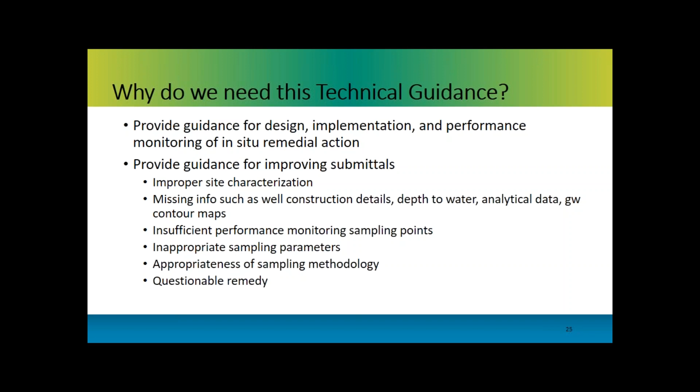The department also saw insufficient performance monitoring sampling points and inappropriate sampling parameters being utilized. Incomplete submittals lead to extensive dialogue between the department, LSRPs, and subsurface evaluators, thus delaying the review process. The department wanted to provide guidance for improving submittals in order to accelerate the review and approval process.

How is this remedy to remediate groundwater contamination identified on the site? The remedy is questionable. It seems as though the remedy is proposed to just clean up the 2 impacted wells and nothing else. There's no extent of groundwater plume identified or delineated, and no down gradient monitoring or groundwater flow direction, no sentinel wells either depicted. Later in the training, during Joe Ludi's presentation, you will see a complete monitoring well network that depicts an appropriate design for evaluating the performance of the remedy and to document the protection of receptors.

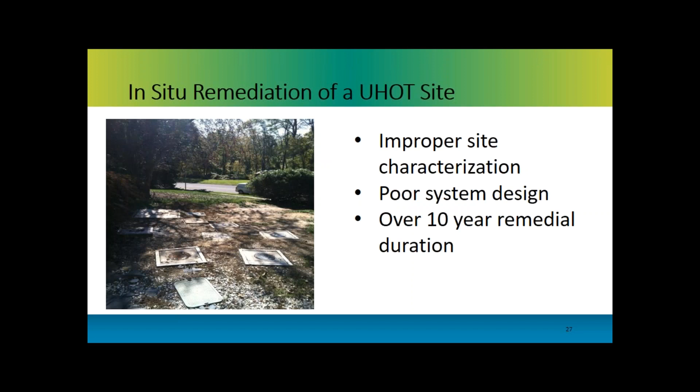Next, I have a few slides from an actual homeowner UHOT site that was remediated via in situ. This homeowner was told that in situ would be less invasive to his property, and this is how his property looked for over 10 years. Poor site characterization and poor system design contributed to the site looking like this for numerous years.

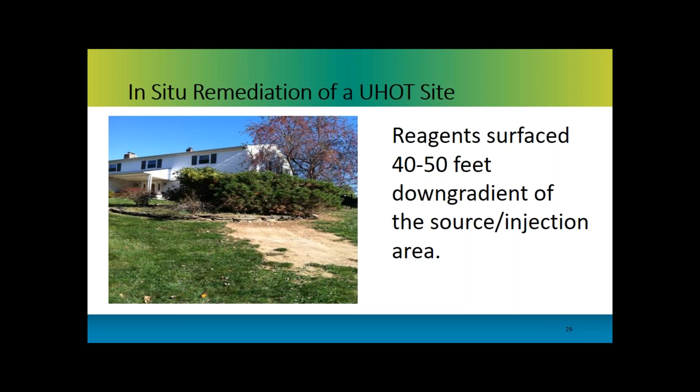An understanding of the subsurface environment is critical when designing an effective remedial action and monitoring program. Not only was the source area where the tank was located greatly impacted by the remediation, but poor site characterization and system design led to daylighting of reagents as far as 40 to 50 feet away from the injection area. As can be seen, the daylighting caused a significant amount of damage to this property.

The remaining slides will go through a brief overview of our entire document, including the appendices and tables. This technical guidance document is meant to enhance the guidance on site characterization concerns, selection considerations, and performance monitoring detailed in the groundwater technical guidance. It provides awareness to other regulatory hurdles, including air permitting, pinelands, highlands, homeland security, etc., and should be used in conjunction with other regulatory and technical guidance.

The regulations discussed in our document are outlined in Section 3. The main regulations discussed are the technical requirements for site remediation, the NJPDES rules, and ARRCS.

Site characterization and in situ remedial design will be discussed in greater detail by Joe Ludi in the next presentation. This section covers the importance of adequate site characterization and development of a good conceptual site model. Both are critical in identifying source areas, defining plume extent, potential receptors, and predicting fate and transport.

Distribution of reagents and contact time with the contamination is key to a successful remediation. This document stresses a holistic approach to be used to remediate sites, not to remediate individual wells. What this document does not tell you to do is which technology to choose. The investigator should use the information in this guidance document to determine which is the most appropriate technology to remediate the site based on numerous lines of evidence.

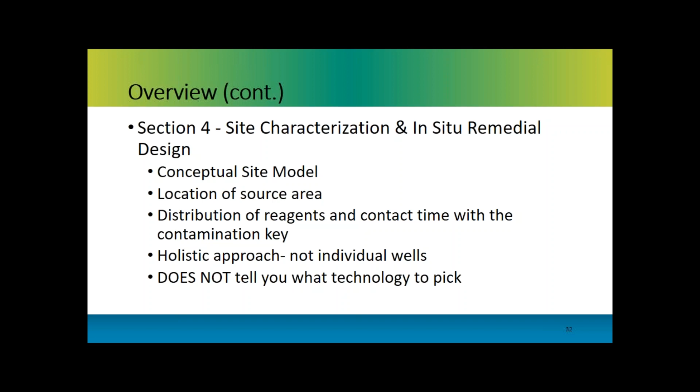Section 5, General Performance Monitoring Objectives, will also be discussed in greater detail by Joe Ludi in the next presentation. Section 5 covers remedial goals and performance objectives, performance metrics, and designing an effective performance monitoring plan.

Section 6 goes into detail about the 3 broad classes of technologies: biological, physical and chemical, and thermal. The investigator should apply the general guidance outlined in Section 4 and 5 and the technology-specific guidance in Section 6 when preparing both the monitoring plan in the remedial action work plan and the monitoring plan in the DGW proposal. This section should also be used as applicable when developing the monitoring and evaluation plans for the remedial action permit application for active groundwater remediation.

Later in the training, we will present 2 case studies that go into great detail on 2 of the technologies listed above. We have a chemical reduction technology case study utilizing zero-valent iron and a biological case study using anaerobic bioremediation to address chlorinated solvents.

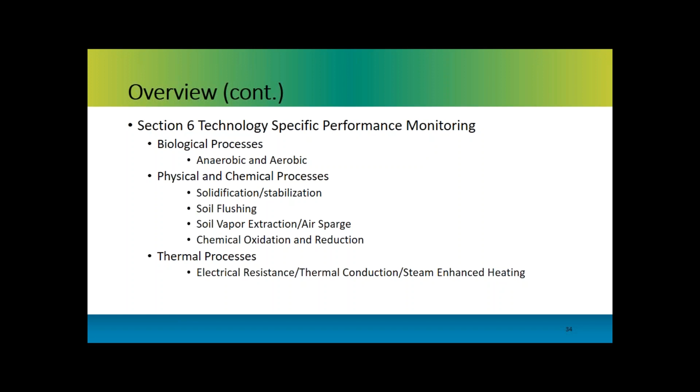Okay, this is your quiz. So everybody online, I hope you are paying attention to this. Which of the following is not a process that this technical guidance document covers?

So we are launching. Are we ready? Okay, so we now have 60 seconds to discuss this. Your choices are biological, thermal, physical, and spiritual. Okay, so seems to be a consensus in this room what that answer is going to be. So let's see by a show of hands. Do we think the answer is A? No. B? C? D? There we go. All right, so just as a reminder that when we are done with the speaker and we have a chance to ask questions, please remember to wait for the microphone and introduce yourself at that time. So how much more time do we have? Oh, goodness gracious. This is fun to be up here and talk about this for another 30 seconds.

Uh-oh, 11% haven't done this. You need to get on here, everybody. Yes, we do have 89% who have submitted this. And you need to answer 3 out of the 4 questions. So I hope the other 11% got 1 more, 2 more. We're doing well, everybody. Okay, 5 seconds. So we have 60 seconds. All right, we're done. Handing it back over to Maria. And the answer, answer is? Here, I'll push it. It's not moving forward. It's not moving. There we go. And the answer is? Spiritual. You are all correct. Yes.

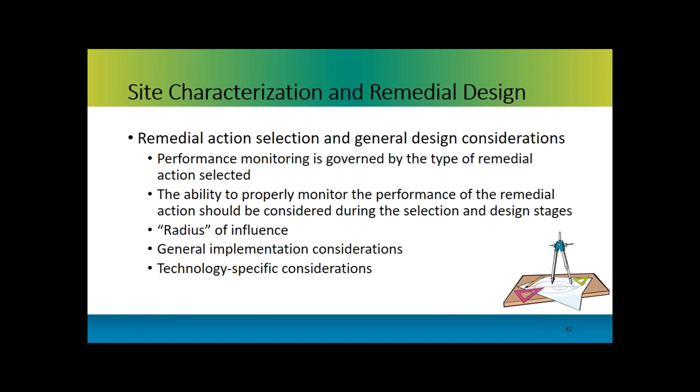Some other general considerations: are we treating all or just a portion of the site? Maybe it's just a pilot test, targeting a small area so we understand if the technology is working before scaling up to the full area. There are also some technology-specific considerations elaborated upon in Section 6.

A critical step towards successful remediation is integrating treatment design and dosing with the performance monitoring. The document includes discussions on injection wells versus monitoring wells.

We're all tempted to see, well, there's that monitoring well over standard, so let me inject something into it and treat it. Well, it doesn't really turn out to be a very good monitoring well after that point. So there's guidance on not injecting into monitoring wells, and also on considering how close to put injection wells to existing monitoring wells so they still remain useful for monitoring the parameters they're meant to monitor.

Which brings up another good point: what are we trying to monitor? Are we doing process monitoring or remedial effectiveness performance monitoring? Process monitoring happens during the actual remediation, while remedial effectiveness performance monitoring occurs before and after, which we'll talk about in a couple of slides.

There's also a discussion in the document on site contaminants versus competing reactants. Does the performance monitoring plan include all the constituents of interest at the site, not just the contaminants, but the reagents you're injecting and other potential byproducts?

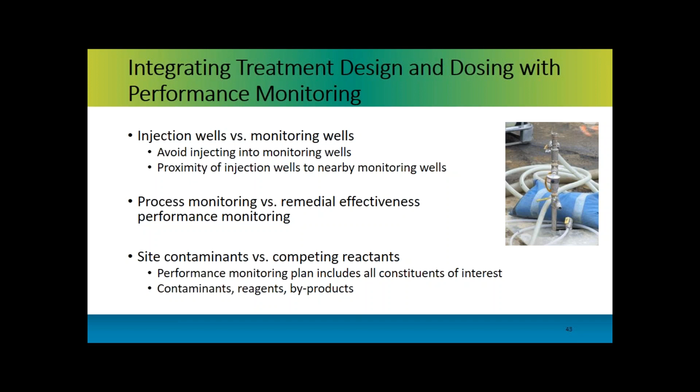So there's a section in the document on pilot testing. What is a pilot test? Why do I do a pilot test? And what are some of the benefits of pilot testing?

It's a good way to assess the feasibility and effectiveness of the technology. It's also a good opportunity to provide necessary design and scale-up data for full-scale remediation, things like radius of influence, injection rates and volumes, and it even helps with remedial cost estimating, a lot of which feeds into the performance monitoring plan details.

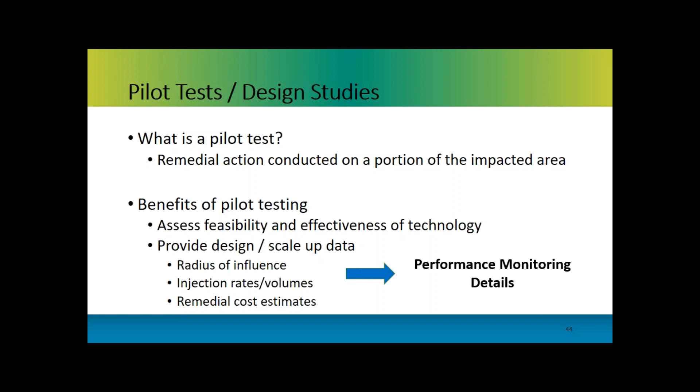As I mentioned a few moments ago, the document discusses the differences between process monitoring and remedial effectiveness performance monitoring. Process monitoring is typically done during treatment to optimize the process.

Am I seeing increases in dissolved oxygen or changes in ORP? Am I seeing temperature increases, changes in groundwater elevation? These are the things that tell me whether what I'm doing right now is actually what I intended to do. Is it reaching where I want it to reach? Is it not going too far?

And then there's the remedial effectiveness performance monitoring, which is probably a whole different set of monitoring wells. Those are the before and after: I started with this concentration, now I'm down to this concentration. Maybe you look at those after one treatment, after multiple treatments, and towards the end of your remedial life cycle.

And there are various performance metrics you look at to determine if the remedial performance objectives have actually been met.

On a related note, monitoring for permit by rule for discharge to groundwater may not be the same as monitoring for a remedial action work plan. The remedial action work plan may include multiple areas of concern, multiple contaminants of concern, and certainly a lot more things than there may be in the PBR.

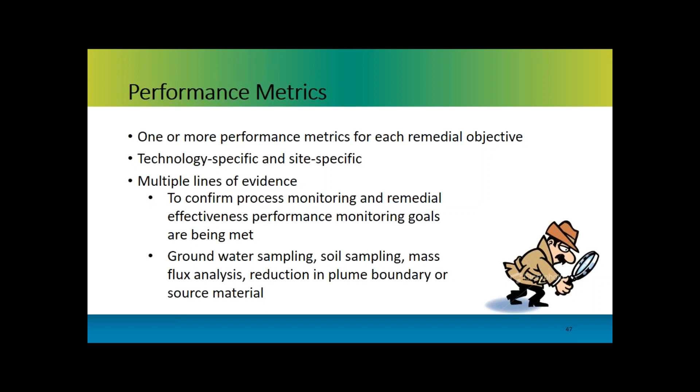There are often several performance metrics for each remedial objective, right? They should be technology specific, site specific, and should include multiple lines of evidence to confirm that the process monitoring and remedial effectiveness performance monitoring goals are being met. And what are some of those? They may be groundwater sampling results, soil sampling results, mass flux analysis, reduction in plume boundary, source material, and other things.

It's important, as I mentioned earlier, that the performance monitoring consider all the various media. So you may have a site that just has groundwater and soil impacts, and maybe some nearby surface water bodies or nearby buildings, and currently there's no impacts at the surface water or in the indoor air at the adjacent buildings. But your monitoring plan should consider whether or not those impacts are a potential once you start your remediation.

Certainly the dynamics of the subsurface change as you start injecting things or extracting things or both. So there are some key factors in your performance monitoring plan that need to be considered as to whether or not those other media may be impacted.

Things like location of the treatment area, contaminant mass flux with or without injections, number and location of injection and monitoring wells, timing and frequency of sampling. Okay, if I inject today, where might it get tomorrow? Where might it get a month from now?

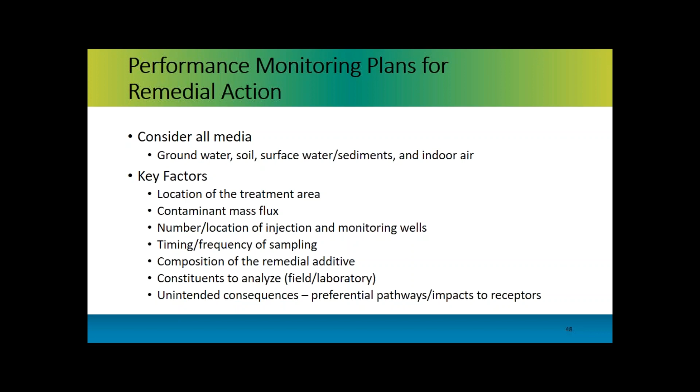Composition of the remedial additive - I have to look for what I'm injecting to make sure it's not lingering on longer than it should be. Constituents and other constituents to analyze for both in the field and in the laboratory. Again, all this leading towards monitoring against unintended consequences, right? Understanding if there's preferential pathways that may lead to impacts to receptors that you didn't anticipate.

As Maria mentioned, she showed a slide of a PBR site plan that was maybe a little lacking in detail. Here's something a little bit more useful to both the investigator who's designing and implementing the plan, as well as the folks at the department that are reviewing permit by rule requests.

So you've got our source monitoring, source area, treatment area defined in gray here. We've got source monitoring wells. We've got our injection wells shown, our injection well radius of influence, right? So that was kind of what we saw in Maria's example.

But we also have background monitoring wells, plume monitoring wells. We show the extent of the dissolved phase plume. We've got some plume fringe wells, sentinel wells, groundwater flow direction. It provides a much more complete picture of what's going on at this particular site.

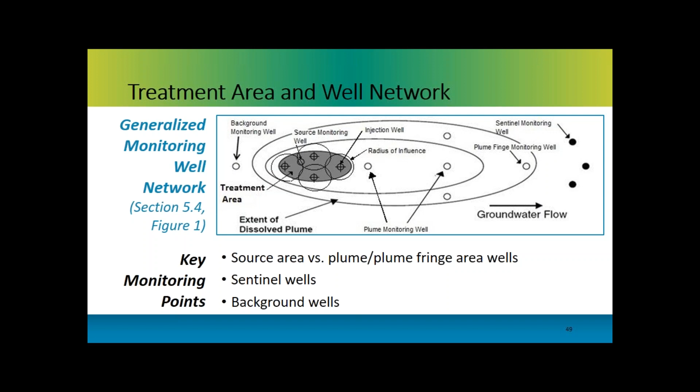And again, that's not just so that you can get your PBR approved by the department, but also helps you understand what you've got, how you're addressing it, and will be helpful during the actual remedial phase to monitor.

Now, I promised a sneak peek into section 6 of the document, and here it is, right? Maria mentioned that we have lots of useful tables and appendices. So one of those tables, if you have in your handouts there, is table 1.

It's the performance monitoring parameter table. It includes a list of field parameters as well as laboratory parameters for groundwater and soil, and the types of analyses using a numbering system to indicate by technology whether the monitoring parameter is: 1, required analysis for DGW permits; 2, a recommended analysis for the particular technology being implemented; 3, a conditional analysis for the technology - maybe you need it sometimes and maybe you don't need it other times; and 4, where the parameter simply isn't applicable to the technology at hand.

So here's a closer look at the table, right? Cover your right eye. And, oh, never mind. So for all of us, and obviously you have it in your handout, right?

So the heading of the table includes a listing of the sampling media and the parameters. And this happens to be an excerpt from Table 1, which Carnum will review during his case study.

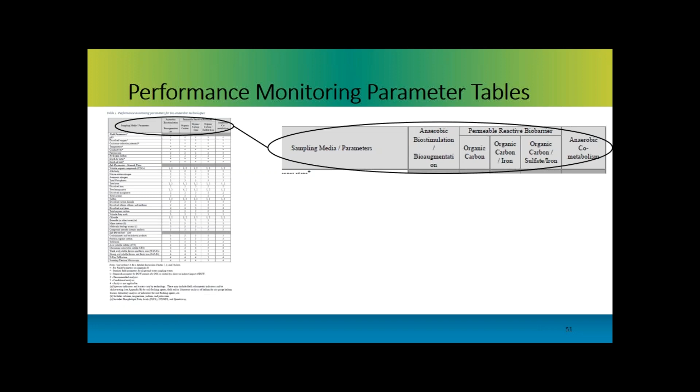Anaerobic biostimulation and bioaugmentation, a couple of different permeable reactive barriers, and anaerobic co-metabolism. Again, you've got a list of field parameters, lab parameters, and here's an example where for volatile organic compounds, they get a 1 and a 2 rating under anaerobic biostimulation and bioaugmentation.

So 1 being DGW required and 2 being recommended for the analysis of this particular remediation. Further down the list, you'll see TOC. TOC gets a 2, so it's not necessarily required to be monitored for your DGW permit approval, but it's probably something that you want to be monitoring for in most cases in an anaerobic biostimulation or bioaugmentation approach.

And then volatile fatty acids, and I think Carnum will discuss these as well. This is something that, well, maybe under certain circumstances, for certain sites and certain reagents, it may be of interest to monitor and maybe not for others. So the point of including that in the table is to say, hey investigator, this may be of interest to you, it may not be, but something that should be considered whether or not it falls into your plan.

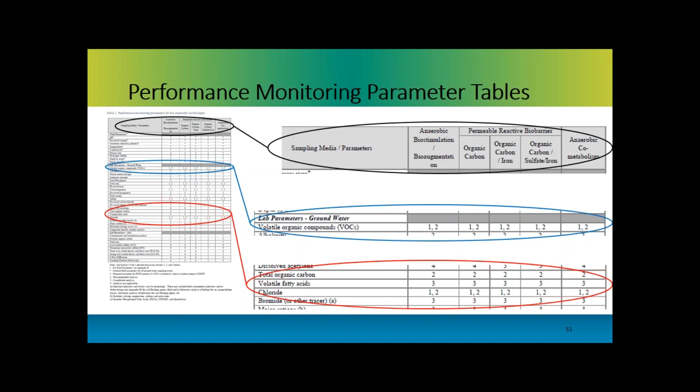And again, this is not an exhaustive list in the document. By no means should it be construed to mean that the department is endorsing or not endorsing something by its inclusion or not inclusion. Just a list of things that the folks on the committee felt were fairly commonly utilized and had a fair amount of experience seeing come across in the various proposals.

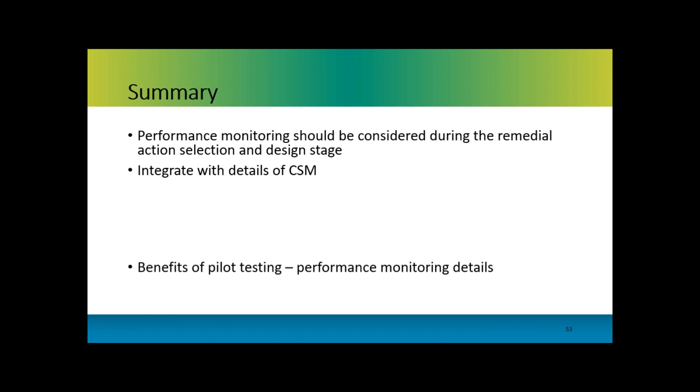So in summary, performance monitoring should be considered during the remedial action selection and design stages, not an afterthought. The performance monitoring plan should integrate with the details of the conceptual site model. Consider the benefits of pilot testing - if nothing else, it certainly provides a lot of performance monitoring plan details. The discussion on the distinction between process monitoring and remedial effectiveness performance monitoring.

Again, the discussion on interim goals and final goals, and you probably have both of those. And again, encourages folks to use multiple lines of evidence when developing your remedial performance monitoring plans. And at the end of the day, use the guidance, the resources in this guidance document to develop effective performance monitoring plans for your sites.

Okay, now is your opportunity, both online and here, to ask any questions. Do we have any questions of what we have covered so far? We're going to be really early. You've been quite thorough, that's very good. Which is awesome in our presentations, I guess. Very good, anything online? Let's give them a few minutes, we'll give them a minute to type up. Nothing? Okay then, all right. We sure there's nothing out here? Okay. Thanks, Lynn. Okay. And then, thank you.

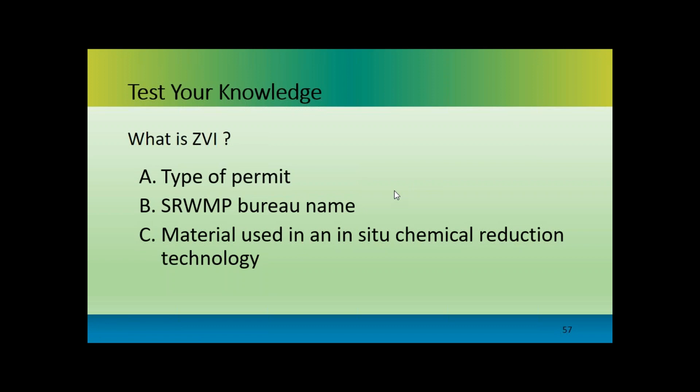Here we go, once again they are going on and their time starts, so it's launching now. That's why I had so much less time last time, because now the clock starts. So now everybody has 60 seconds to fill in the answer. So what do we think here? Is ZVI a type of permit? Yeah, no. Is it a bureau name within the Site Remediation and Waste Management Program? Some chuckles in the audience. And how about, is it a material used in an in-situ chemical reduction technology?

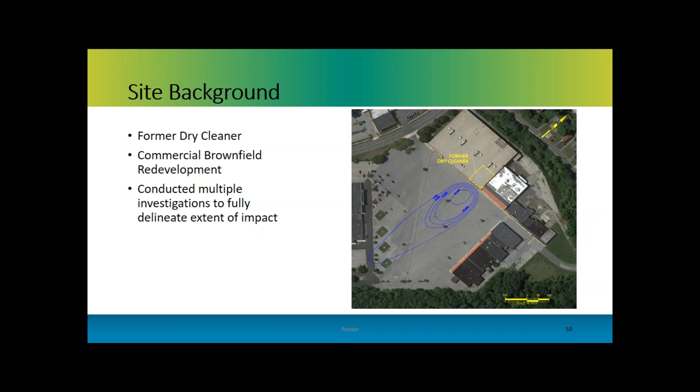So we had a lot of investigation, we had a lot of data to deal with. We were starting out this project in a pretty good place. And then it was completed.

For this particular project, we had a very limited treatment time frame. The site was being redeveloped for a retail center, to be open for the Christmas shopping season, so the site had to be up and built, and all of our remediation had to be done by Thanksgiving. We could not be doing anything at the site between Thanksgiving and Christmas. Not only that, because this was an active construction site, there was a lot of activity going on all the time - cranes, crews going back and forth - so we had a very limited area of the site that we could operate in. Once the site was built, we had to have no above grade operations. The area was to be a parking lot used for parking, that's it, we couldn't have anything above ground.

From a remediation point of view, our goal was to achieve significant mass reductions in the core area of the plume, and then allow for monitored natural attenuation to treat the remaining lower concentrations. We'd done a very significant amount of three-dimensional fate and transport modeling to confirm that the MNA would work and that we would not impact any downgradient receptors.

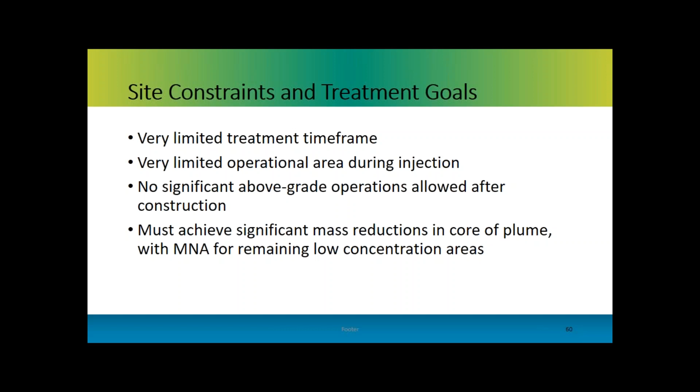Then above that, we had a zone that was called the shallow saprolite zone. It had a much coarser texture, more like sand from a textural point of view, but it still was saprolite material. Higher porosity, higher permeability, somewhat lesser concentrations up in this zone.

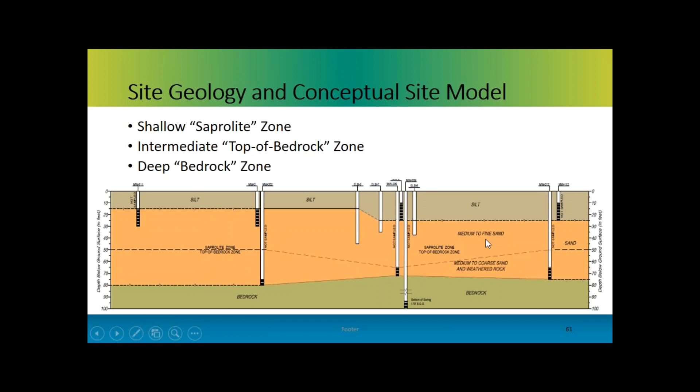So when we were evaluating our remedial action for this particular site, we had a number of things to consider. We evaluated multiple technologies, including pump and treat, AS/SVE, and so on. These were eliminated pretty much up front because we couldn't have anything remaining at the site once it was built out. We looked at our microbial population and found it was insufficient to promote significant biodegradation. But given all the site constraints—the limited area to work in, the limited time frame, the fact that we couldn't have anything above ground at the end of the day—we decided to go with ZVI for treatment of the source zone.

We did conduct a treatability study using on-site soils and groundwater to confirm the effectiveness of the technology. However, given the time constraints, we simply did not have time to do a formal pilot study. We did do an informal pilot study at the beginning of the injection process, where we did an injection, looked at our radius of influence, looked at concentrations at certain locations, and looked at our iron concentration in groundwater and so forth. So we were able to determine that, yeah, it was working, but this was not anything near a formal pilot study type program—this is kind of a back of the envelope approach in the field.

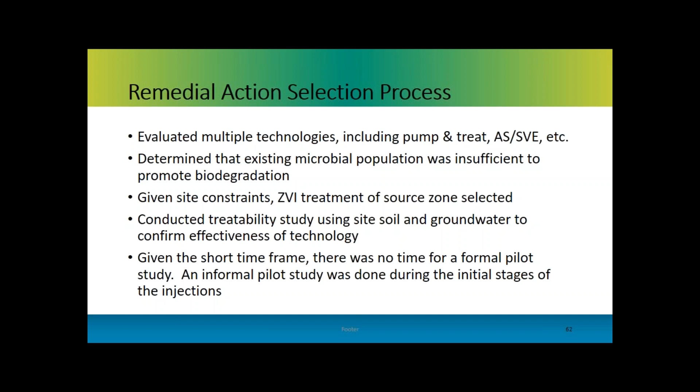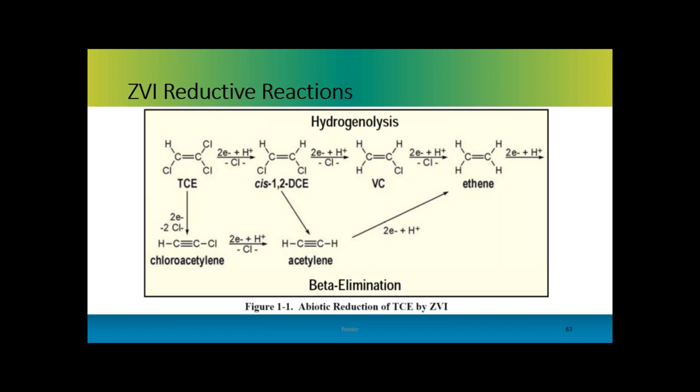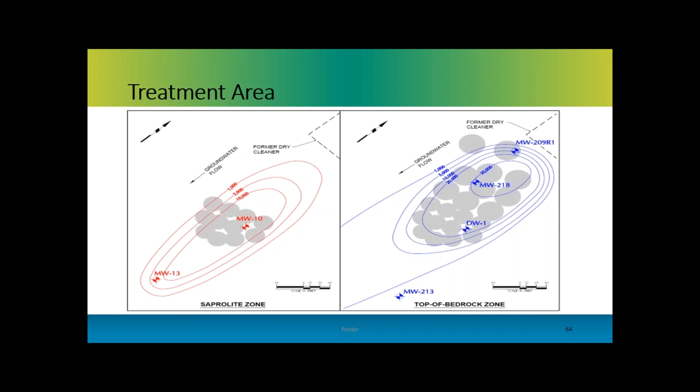So here's what we're talking about. We used microscale zero-valent iron, or Ferrox is the trade name, at a dosage on average roughly about 0.5%, and it was injected using pneumatic fracturing technology.

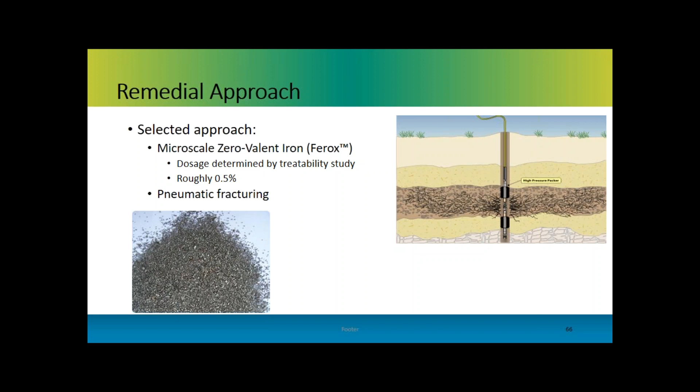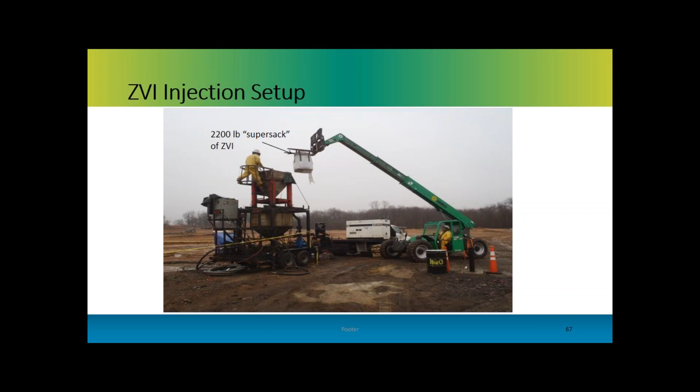The ZVI gets dumped into a hopper, then goes down to a mixing unit where we make up the ZVI slurry. We took very detailed measurements of the amount of ZVI per volume of water, so we know exactly the mass of ZVI going into each batch. Down here you had the various equipment associated with the actual injection of the ZVI.

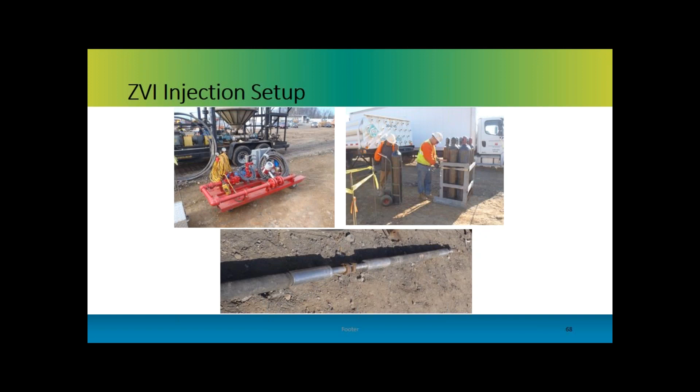During the injection, as part of our performance and process monitoring metrics, we monitored a number of different parameters, probably the most important being our radius of influence. One way we evaluated this was by laying out a network of very sensitive tilt meters in three dimensions radiating outward from a given injection point. Those were surveyed, and as the injection took place, we measured the amount of ground heave on the surface. That enabled us to determine that we were achieving both our minimum 30-foot radius of influence, but in some areas we were getting out to about 100 feet.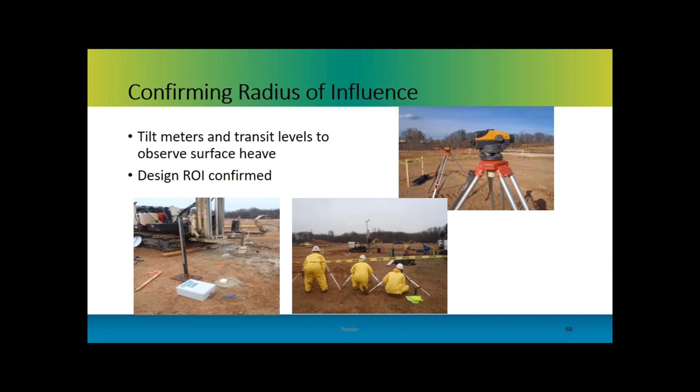That was a bit of a concern. Again, you want to have a substantial radius of influence, but on the other hand you want to hit your target as well. So we had to reduce our injection pressures to a certain extent to make sure our radius of influence was not too large.

It comes to the surface and can occur from a variety of different pathways. In this particular case, we had a borehole location that wasn't properly grouted, so we had to go in and auger that location out and completely regrout it. A variety of other things can happen too—just normal microfractures in the formation can result in this. There's a couple of points here: when you look at this, it looks terrible.

We calculated, for that particular injection, an estimate of the volume of ZVI that made it to the surface. When you compare the volume or mass of ZVI that made it to the surface versus the mass we're actually getting into the ground, it's a fraction of 1%. So it's a very minor amount, but it looks terrible.

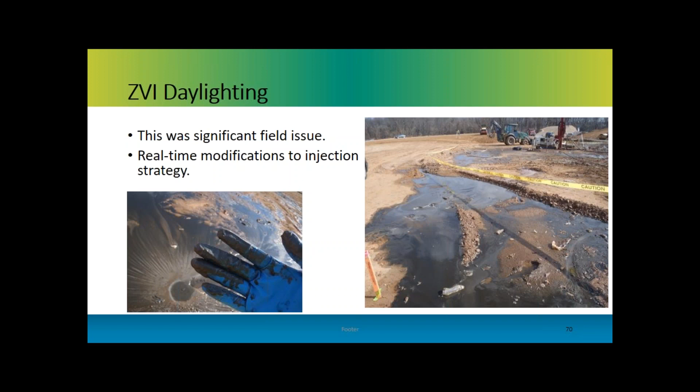That approach worked for the rest of the site. We got a little bit of daylighting here and there, but we were able to control it.

So this gives you an idea of some of the things we were working with. This has to do with the remediation technology being very effective, given that we had a very, very complicated and congested work area, an ongoing construction site.

You can see here's our geoprobe rig right here, and a crane transporting a major section of rafter right adjacent to it. This is basically our treatment zone superimposed on the final site redevelopment, kind of an oval shape.

Given the time frames, we had to have 2 crews working simultaneously. For health and safety reasons, since you're doing pressure fracturing with high pressure gases, you have to keep a radius of 40 feet on either side of the rig, meaning a circle with an 80-foot diameter around the rig that nobody can enter during injection. So with 2 rigs working simultaneously, we had to keep them separated.

The way we did it was having one rig work on this side and one on this side, and we basically walked the 2 rigs counterclockwise around this oval surface so they could keep the injections going simultaneously without violating that circle that nobody could enter.

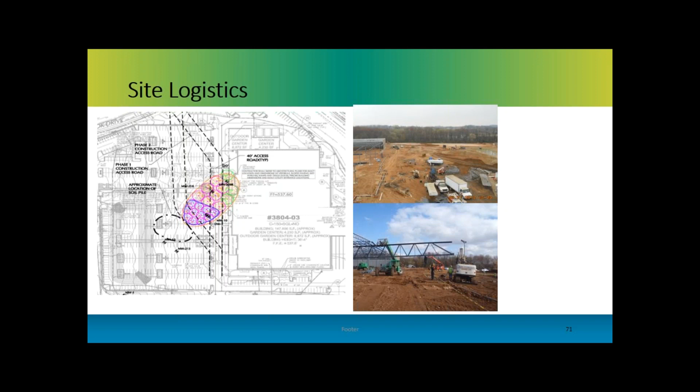You can see here the outlines of 2 separate access roads, and we used each of these roads at different times during the process so they could have access to their site while we were doing the injections. All of this had to be worked out with the actual construction contractor.

So what do we have? At the end of the day: 21 injection points, approximately 401,000 pounds of ZVI injected, approximately 179,000 gallons of water, over 29 days for the injection from February to March of that year. Critically, once our injections were done, the construction process continued, the building was built out, and they were open for Black Friday after Thanksgiving that year.

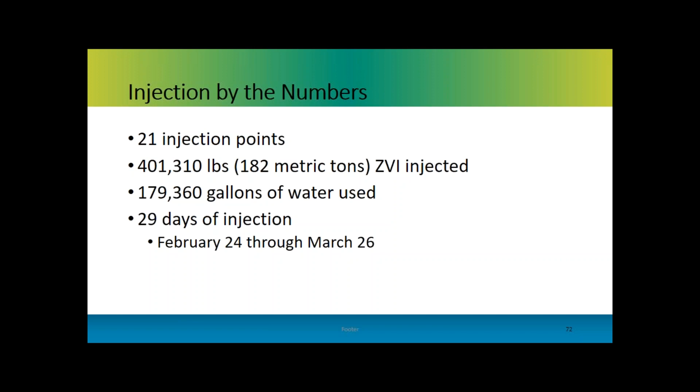As I mentioned before, the recommended process monitoring and performance monitoring parameters for ZVI, in terms of locations, frequency, and duration, are provided in Table 7 of the guidance document.

For this particular program, we opted for 2 years of quarterly monitoring in selected source zone wells and downgradient wells, both in the saprolite and top of bedrock aquifers. Our field parameters included temperature, pH, dissolved oxygen, specific conductivity, and ORP. Our lab parameters included chlorinated volatile organic compounds, CVOCs, and we also added iron.

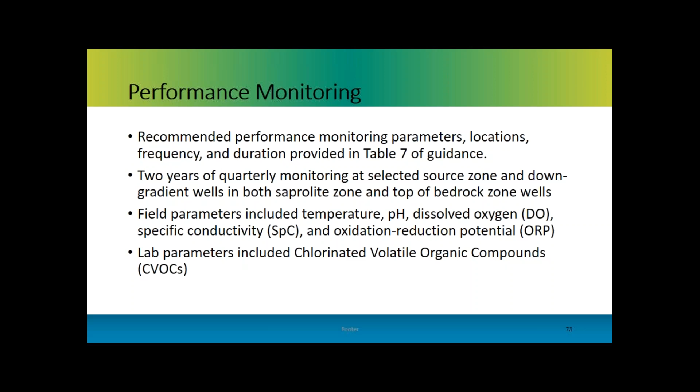Then looking at another top of bedrock zone, at 218 we had a 97% decline in PCE concentration, from 17,000 down to 494. Again, still above standard, but it's still going down. Your pH is still elevated across, and your ORP has dropped way down and continues to be down.

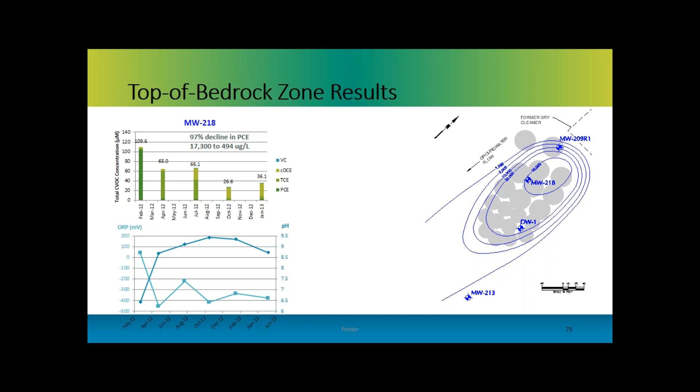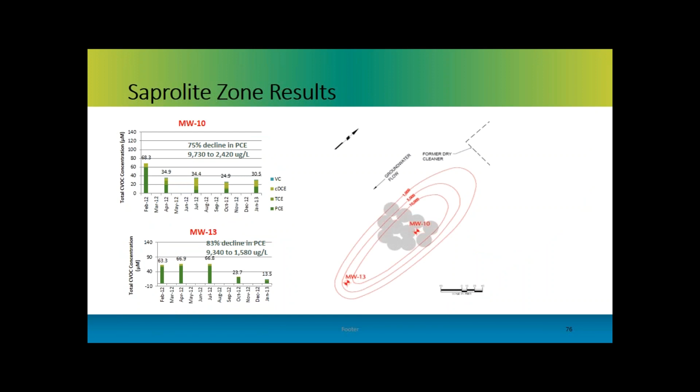And then at a saprolite zone well, both MW10 and MW13, we had about a 75% decline in PCE at MW10 and about 83% decline at MW13. Overall, we had a dosage of about 4% iron to soil mass ratio, and that was sufficient to treat about 20 ppm of PCE in less than about a year.

So we had significant mass or concentration decreases over a very short time frame. Pneumatic fracturing was very effective in creating significant porosity and permeability in our formation, so we could get our reagent in there. Again, it's a contact sport, and we were able to get contact.

In terms of our treatment area, we determined that our actual treatment area extended about 110 feet down gradient from our initial treatment zone. So we were getting plenty of mass into the ground, and we were able to document that the radius of influence was sufficient to meet our objectives and get the remediation accomplished.

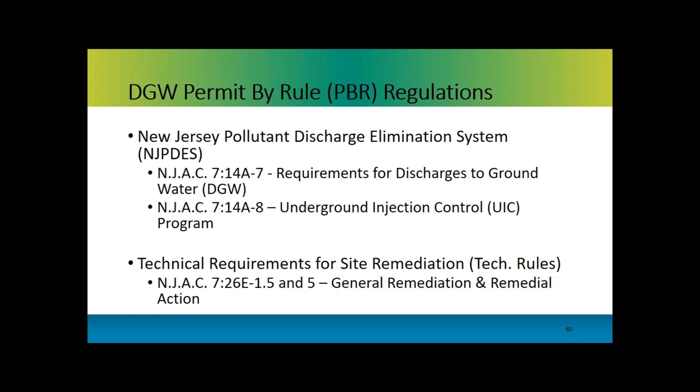And the permit by rule originates in the NJPDES regulations. You can see from the titles of subchapter 7 and 8 where we get the terms DGW and UIC. Section 7.5 of the NJPDES rules describes the discharges that are authorized by permit by rule, and it also refers to various parts of the tech rules. As we go along, we'll talk about the details of those PBR-related tech rule requirements.

Okay, so some permitting basics. You need some type of NJPDES permit for most injections and all discharges of pollutants onto or into the ground. Now I'll explain what I mean by most injections in a little while, so don't worry about that. And the term DGW includes discharges that are just in the unsaturated zone, maybe for soil treatment—it's still called a discharge to groundwater.

The purpose of the permit monitoring is to look for potential and expected negative impacts of the discharge, so it's a little different focus from the RAO monitoring, which of course includes looking for those positive impacts. And Joe had mentioned that.

So the permit by rule is a type of permit that you are deemed to have when you comply with certain specified requirements in NJPDES or the tech rules. The permit by rule that site remediation developed includes all discharges that are part of remediation regardless of the duration of them. It also includes discharges that are from dewatering at contaminated sites, and also if you have to dewater to remove or install an underground storage tank.

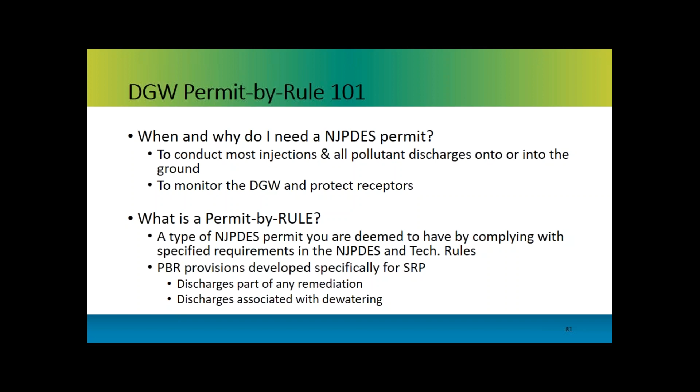So what are those specified requirements? You need to submit a DGW proposal to the department and get our written approval of it. One thing to keep in mind: the DGW proposal is not officially a NJPDES permit application. It's not subject to the same requirements as permit applications, but if you call it that, it's okay—a lot of people here do that too, but that's the official name.

And we also developed some PBR provisions that are for limited types of discharges, those that are associated with sampling, installing, or developing monitoring wells. And the requirements that apply to those discharges are in these two parts of the tech rules and these two sections of the field sampling procedures manual.

I'll talk a little bit more about that on the next slide, which gives us some common examples of discharges and whether or not a permit is needed for them, whether or not the permit by rule requires a proposal and our written approval.

The first one is why I said most injections before. If you're doing air sparging or injecting dissolved oxygen, or injecting oxygen to increase dissolved oxygen, we've said no permit for that. It is regulated by the tech rules, but no permit.

The next one is the purge water related discharges that I mentioned. Yes, there are PBR provisions and a permit for that, but it doesn't require getting or putting it in a proposal or getting our approval. But if you wanted to inject that same purge water, then it does need to be included in a proposal that gets our approval. And the last two are examples of typical discharges that are part of remediation.

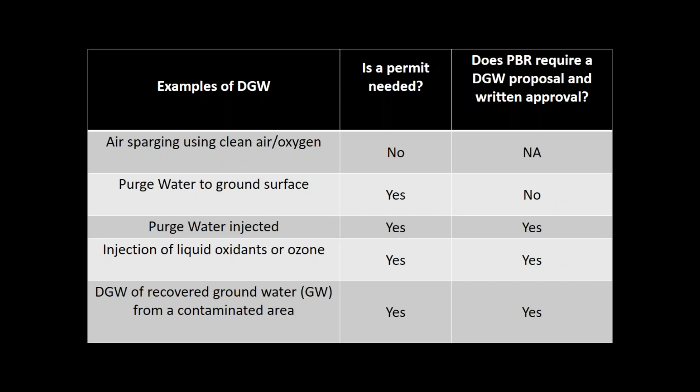Okay, these are some of our guidance documents. Section 7.1 of our technical guidance includes pretty much everything I'm going to be talking about today. The instructions for the form associated with the DGW proposal are very detailed. Please use those when you're filling out the form and when you're preparing your proposal. There's a lot of detail in there.

The next guidance document is from 2007, the NJPDES technical manual. In 2013, we wrote up an update page that tells you which regulatory citations in the 2007 manual are out of date, what procedures changed, and some other information. So definitely read that update page before you use the manual. But there's a lot of detail in that manual that isn't anywhere else. Okay, so it is very useful still.

And it also explains the PBR for purge water and those types of discharges that don't need our approval, and refers to the two sections of the field sampling procedures manual that include the requirements for those discharges.

Okay, so how do you get started with this process? You submit your form, your fee, and your proposal to BCAIN. Everybody knows BCAIN, right? So they'll put it in our database and make sure the fee's there and refer it to our bureau for review.

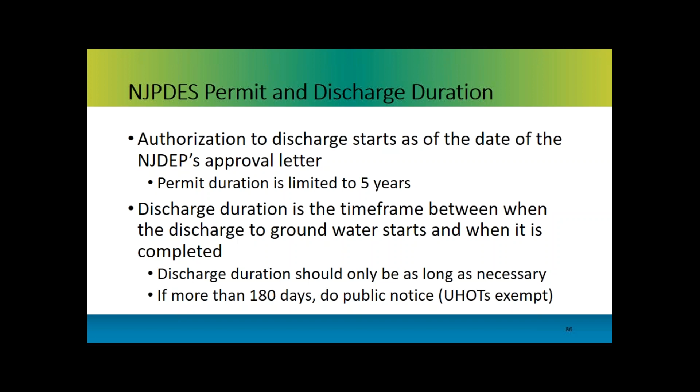Okay, once again, we have a test question. So what is the maximum NJPDES permit duration? Is it 100 years, 50 years, 10 years, or 5 years? So let's ask the room, do we think it's 100, 50, 10? Okay, 5?

All right, so we're paying attention here. I hope everybody online is doing that as well. I have lots more time because reading those answers didn't take up too much time.

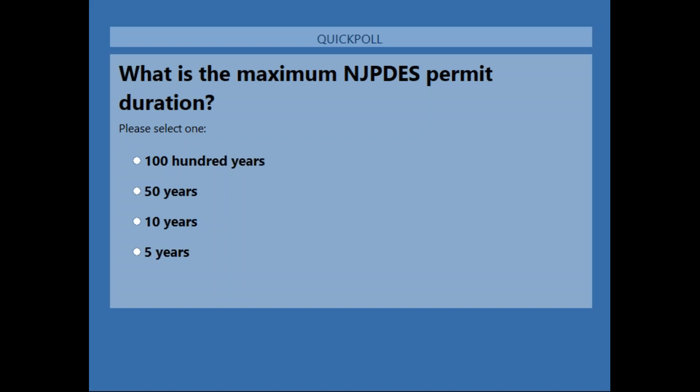Am I too close to the mic, or is it good? Oh dear. Technical difficulties. Okay, we're going to take a 2-minute, hopefully only 2-minute technical break because we're having technical difficulties with getting this back online. The screens were not advancing, so people in the webinar were having technical difficulties, so don't go too far. Dear, I'm so sorry this happened to you. Do we know this? Go back to the...

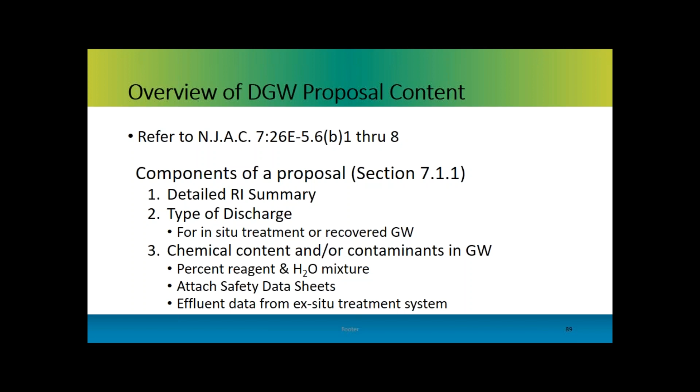Okay. And nothing's happening. Oops, no, I went too far. Okay, so...

As far as the volume of the discharge, we're looking for the total volume of the mixture of reagent and dilution water, your best approximation of that total volume. And...

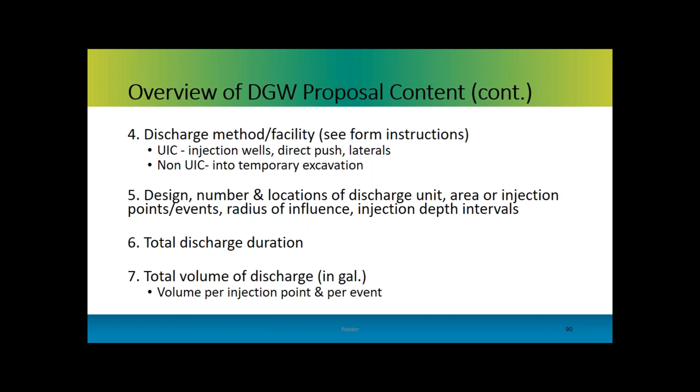Now we get into some information regarding that question that was asked about the iron. We want a description of all the potential effects on all receptors, not just groundwater, but anything else that could be nearby, as Joe mentioned in his talk. This should also include whether or not there's expected exceedances of the groundwater quality standards from any materials in any of the reagents, such as iron. Could affect pH, of course — there's a lot of sodium sometimes in these reagents.

So talk about whether or not you expect any of the groundwater quality criteria to be exceeded because of the discharge. I'm going to talk about items 9 and 10 a little more in the next couple slides, but that's relevant to how you maintain compliance with the groundwater quality standards, even though you may have some exceedances of some criteria.

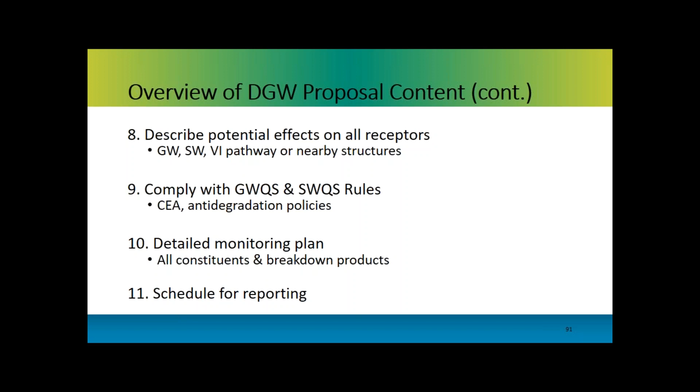Okay, as far as the reporting, usually the permit data should be included in the RAR. There may be some situations where it needs to be reported before that, but that's the usual, typical thing. The guidance talks about situations where it might be appropriate to submit the data more frequently.

I mentioned before about the purpose of monitoring, and you should keep that in mind when designing the monitoring plan. That could impact all aspects of it, including the duration of monitoring.

Getting baseline groundwater data is very important. There's a lot of other sources of iron and sodium out there, so you want to know where you're starting with those things that are in the reagent, so that you can compare the baseline data to the post-injection data and see what kind of impacts resulted.

Process monitoring could be looking for the daylighting issues that Ken mentioned, and if there's vapor intrusion, if there's buildings nearby, that would be something to monitor during the injection. We're not as concerned about the daylighting unless it has some kind of significant negative impact on a receptor. So that's kind of the focus of the permit monitoring.

Joe covered in a lot of detail the information that's in sections 5.4 and 6 of our technical guidance, so definitely use that when you're developing your plan.

I'll just mention about the sampling methods. There's a couple paragraphs in section 5.4 about the possible impacts of sampling methods on your results, so take a look at that.

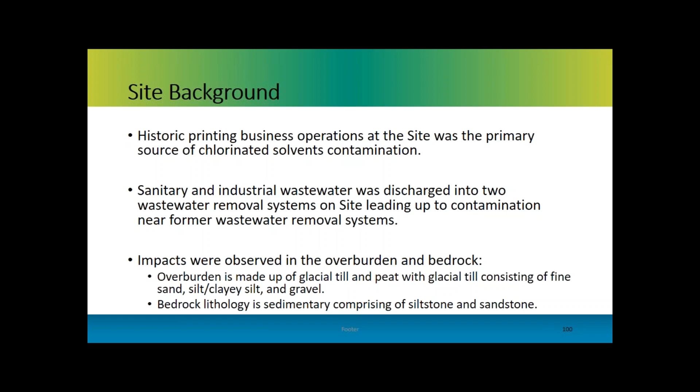So TCE is the major contamination, or bulk of the contamination, at the site. There is tremendous natural attenuation of TCE, by that we see a significant amount of daughter products, which in this case is cis-1,2-DCE and vinyl chloride. The groundwater has migrated from overburden into the shallow bedrock, and the groundwater flow at the site is towards east.

Okay, here it is, the last quiz question of the morning. Which of the following is a breakdown product of PCE? Is it xylenes, cis-1,2-DCE, benzene, or MTBE?

So we'll ask the room the question. Do we think the answer is xylenes? Do we think the answer is cis-1,2-DCE? That's nice. Benzene? Yeah, or MTBE. Okay, just figured I'd give all the answers out anyway.

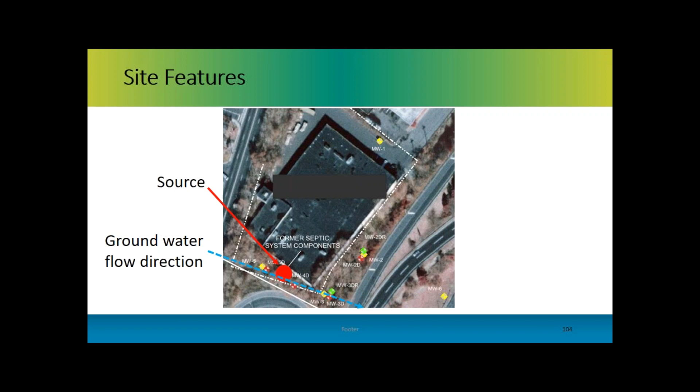So the red circle is the source from the printing press operations, and then the groundwater flow direction here is shown in the blue dashed arrow, which is east southeast.

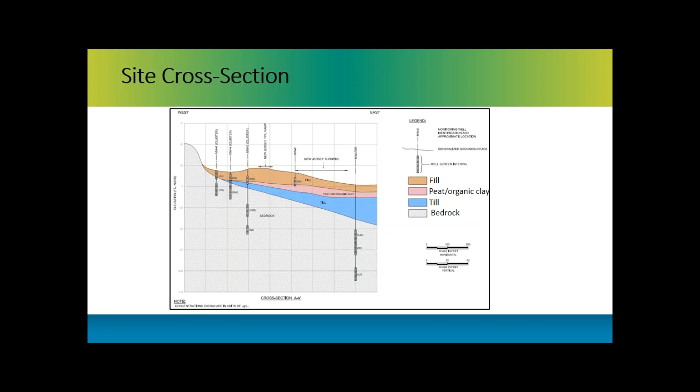And we do have monitoring wells covering the overburden, the shallow, and the deep bedrock. I think the contamination is right now somewhere from 1/3 of the slide from your left all the way to the right side of the slide. That's where most of the contamination is.

So the standards for, like most of the New Jersey sites here, is class 2A aquifer, which means for PCE, TCE, and vinyl chloride, it is 1 microgram per liter.

And the technology we chose was, well, the way we wanted to meet this goal is through an active treatment followed by MNA sequentially, and doing that multiple times.

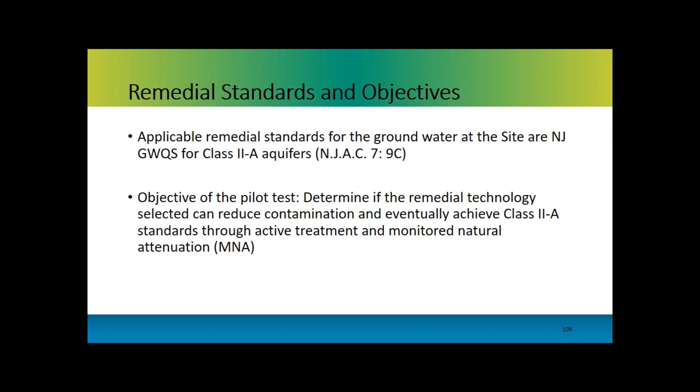The permits required for doing the pilot test, all my colleagues have already talked about that—the permit by rule, discharge to groundwater for injecting the electron donor source for this testing, and also some of the permits required by the driller from Bureau of Water Allocation with regard to installation of certain injection wells and drilling at the site.

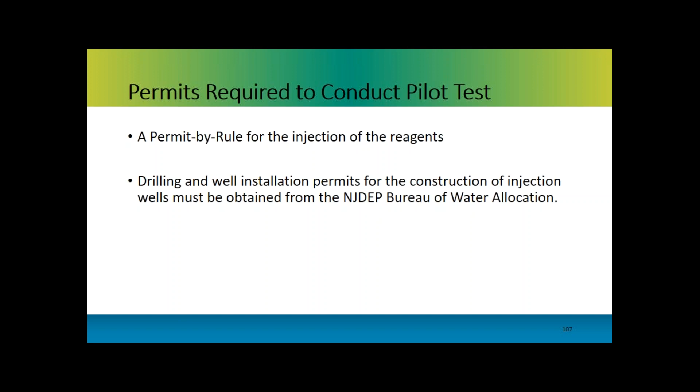Because we have a lot of natural attenuation going on at the site, it made a lot of sense to go with anaerobic biostimulation, or what we call enhanced reductive dechlorination. We targeted, as part of the pilot test, both the overburden and the bedrock, shallow bedrock. For the pilot test, the long-term electron donor used was a microemulsion. Finally, we compared the post-injection results with a baseline and tried to see if the TCE is degrading, to monitor the performance of the pilot test.

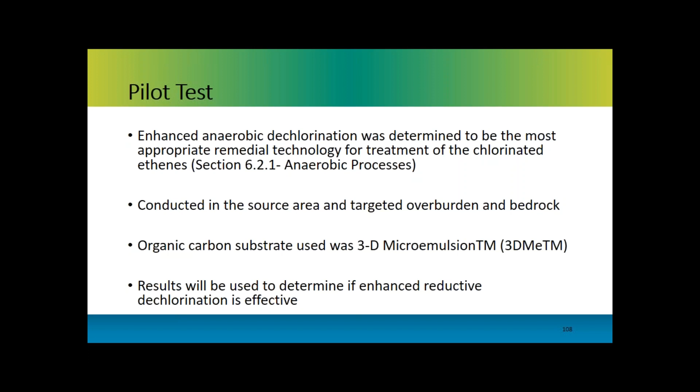So we had 10 injection points, and 7 of those were direct push points using a geoprobe. The remaining 3 were through injection wells because we were targeting the bedrock.

And the dosing typically depends on the site-specific parameters. For example, what is the natural organic carbon we have at the site? What is the conductivity or the flow velocity? What is the porosity? And of course, what is the electron acceptor load in the groundwater—things like sulfate, the nitrates. Typically sulfate, because most of your electron donor demand, about 75% or greater, is due to sulfate more than the contaminant itself. So we had all this data, and then we eventually dosed it.

I think Joe already talked about table 1 we have in the handout. If you can refer to the table, I'll go through the next few slides referring to the table back and forth.

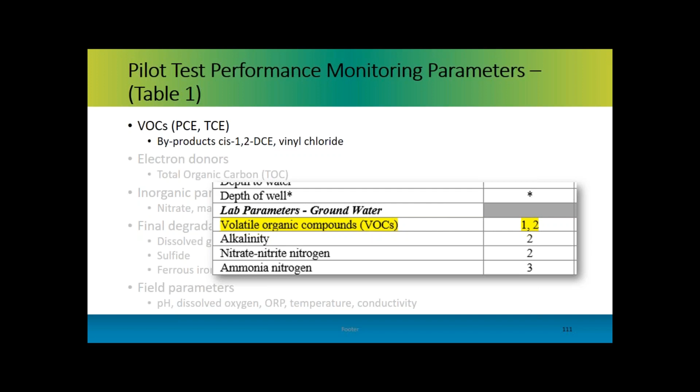So basically, we looked at all these performance monitoring parameters for the pilot test. For example, VOCs—I'm repeating myself, but it's the core of the document. So we did VOC, it was scored a 1, which means it is part of the DGW permit requirement, and 2, it is also a recommended parameter for this particular technology.

Again, TOC is a recommended parameter for most of the anaerobic treatment technologies. And sometimes, if the project budget permits, you can also go the next step of doing a volatile fatty acid analysis. The reason you do that is for things like acetate, lactate, those kinds of organic acids. The reason you do it is when you inject some emulsions or oils, it doesn't travel as much in the soil. But if you want to have a good radius of influence, let's say 20 or 30 feet down gradient, lactate is highly soluble, so you can get that information, which you typically may not be able to get from TOC itself. TOC costs maybe $20, $30 a sample, and VFAs cost 3 times as much.

But then you don't have to do all the wells. In this pilot test, we had about 8 wells, and we were able to do 2 wells, start and end, for VFA. So that's a choice.

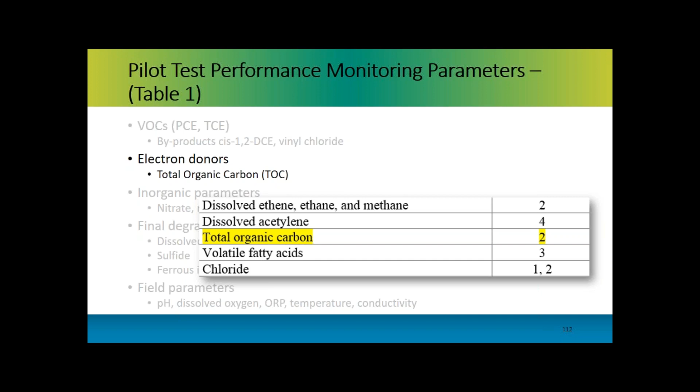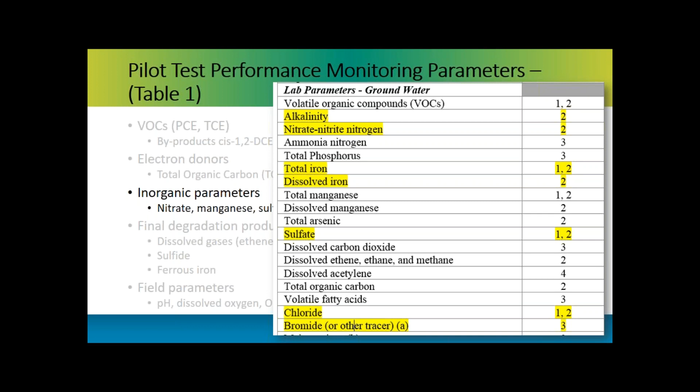As far as the geochemistry is concerned, definitely the sulfate, the iron, and the chloride get number 1 because it's part of the DGW permit. Then the others, such as nitrate or even dissolved iron, are 2, which is recommended for this technology. And bromide is a conditional parameter—we used it as a tracer, so we know where the injected reagents are traveling. So we did analyze for bromide as well.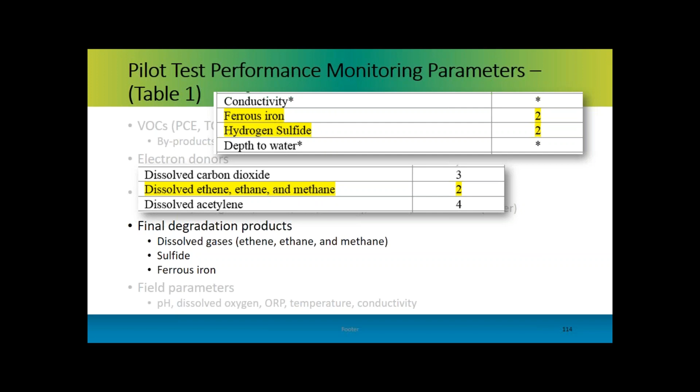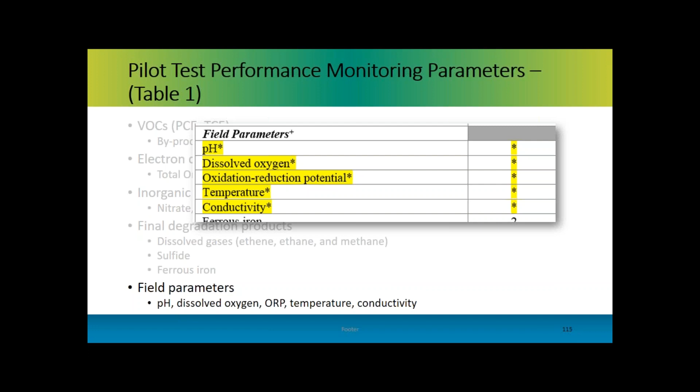And then eventually, the byproducts—if iron is reduced, you get a spike in ferrous iron. Likewise, if you reduce sulfate, you get a spike in hydrogen sulfide. So we had both analyzed as part of the field kit. Then, as part of the lab parameters, the end products are ethene, ethane, and methane, which we check for most of the chlorinated solvents. And finally, the required field parameters as part of the DGW permit, which is those 5, and clearly ORP is the driving force—we want to have a negative ORP at any of the anaerobic testing.

As part of the monitoring well network, we had at least 2 wells in upgradient locations, 2 within the treatment zone, and 2 at the down gradient. The idea of upgradient wells is to see what the geochemistry of water flowing into your treatment zone looks like, so any changes in geochemistry can be measured to give you an idea of the performance of the technology. At the down gradient locations, you get some idea about the radius of influence—how far from the injection area you're able to see the influence of your injectates.

So 3 slides on the results itself. This is a graph plotting concentration in micrograms per liter versus time in months.

If you're really looking at a mass balance, you may be interested in showing this as micromoles or molar, not ppb concentrations. Time scale: 0 month is when we injected the substrate, and -5 is the baseline sampling, 5 months prior to injection.

What is the data we are going to compare the post-injection results with? There are 2 points as part of the pilot testing: one at 2 months, another at 5 months. Then we extended the study to 2 years and picked up a point at 24 months.

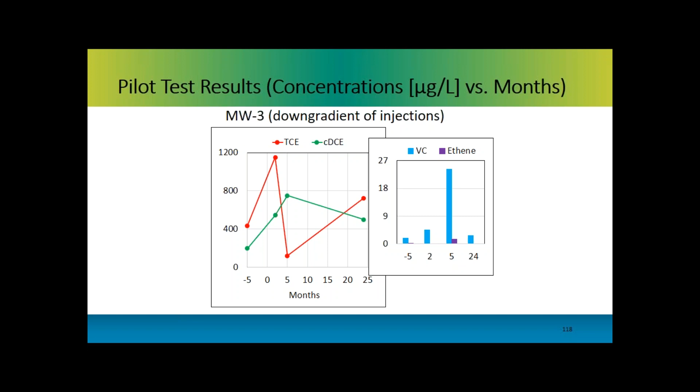One more well, this in the bedrock close to the injection locations. The trend is the same: TCE decline is accompanied by byproduct accumulation.

The other thing you want to see besides the VOC itself, as secondary evidence, is changes in the geochemistry. Remember, I talked about the upgradient location being the treatment zone. For example, this is monitoring well 4D, in the bedrock, where we're trying to compare pre versus post injection.

You do see about a 5-fold increase in TOC, which is good because we injected the reagent, and we're glad to see it in the well because we know it's flowing that way as designed, the substrate.

There are two things happening with other geochemical parameters: sulfate is decreasing by 5-fold, and methane is increasing by more than an order of magnitude. Sulfate reduction and methane formation are strictly anaerobic processes, and an anaerobic environment is required for dechlorination. So it all correlates well.

We're also glad to see bromide show up in the wells, up to 2 milligrams per liter, so we have some idea about the reagent travel.

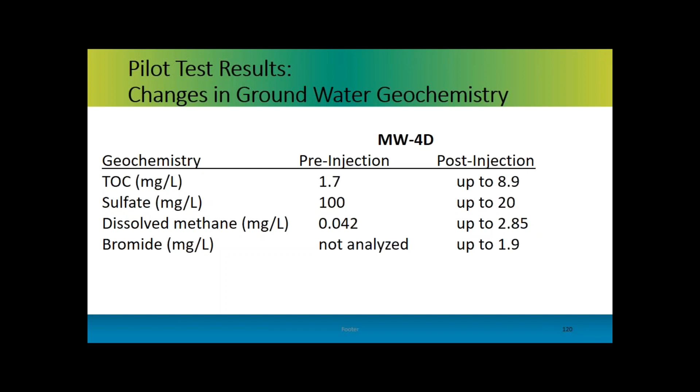So with the lessons learned from the pilot study and based on the results, we scaled it up. We were comfortable to scale it up to full scale.

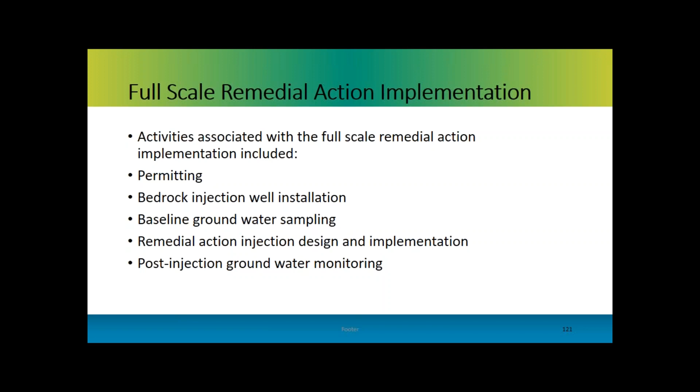These are some of the things associated with the components of the full scale, starting with the permitting and the baseline sampling, which was already done about 3 months ago. We just started this project last quarter.

As part of the injection itself, for the overburden, we have 10 points again, all direct push points, and we constructed 5 new wells. We already had 3 injection wells originally, so there's a total of 8 injection wells covering the treatment area.

This time we also included bioaugmentation, injecting the bacteria Dehalococcoides, which degrades TCE all the way to ethene. We wanted to not only biostimulate by adding the electron donor, but also add the culture, which helps tremendously with the degradation kinetics, since it's not much extra investment to do bioaugmentation when you're already injecting an electron donor.

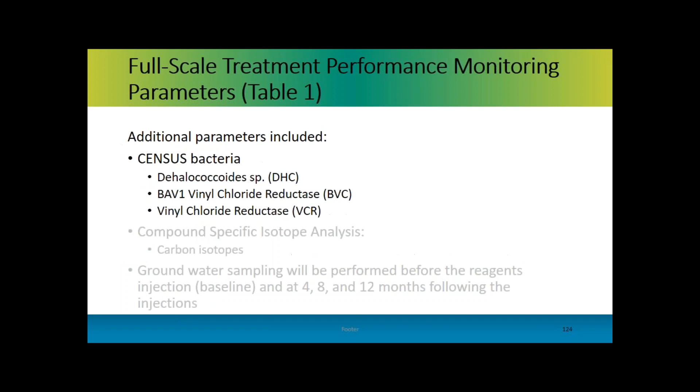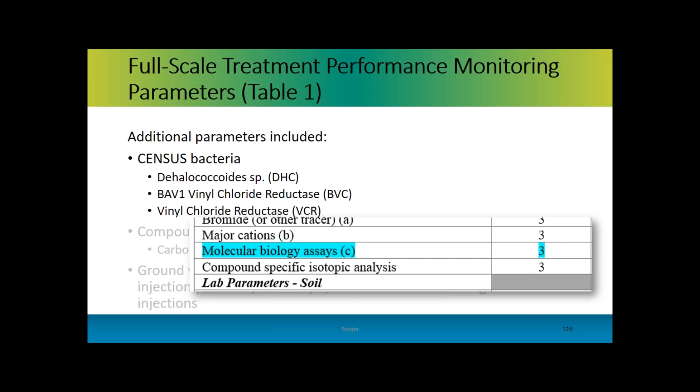As part of the performance monitoring itself, we included all the parameters we did for the pilot, but we also did two things extra. One is CENSUS bacteria, which is scored rate 3, meaning it's a conditional parameter - if you have the technology and it's worth doing, go ahead and include it. So we did that, monitoring how many Dehalococcoides population is present at baseline so you can compare post-injection, hopefully an increase, and then looking at the enzymes that can degrade vinyl chloride past to ethene. So we did that.

We also included compound-specific isotope analysis, commonly referred to as CSIA. You could do carbon and chlorine here, but we prefer carbon because we know it's our plume and we're treating our plume. Sometimes when you have back diffusion, such as we're observing at the site, CSIA can help differentiate degradation versus back diffusion based on the numbers.

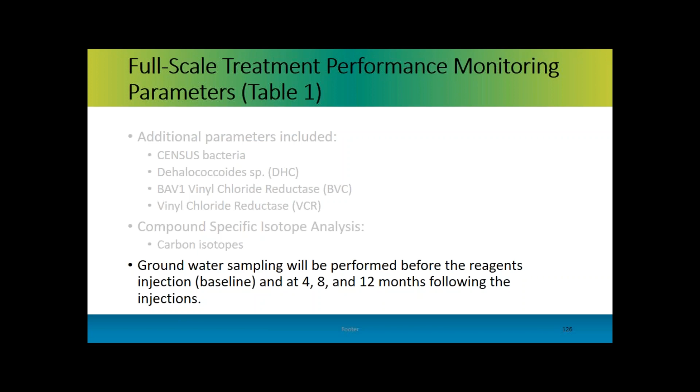Next February we're picking up our first post-injection sampling, and by end of next year, 2018, we'll be wrapping up at least some idea about the post-injections.

To conclude, it made a lot of sense for us to go with anaerobic biostimulation because we have abundant proof of monitored natural attenuation going on at the site. A proof of concept pilot test was done, which was pretty promising, leading us to do the full scale. We procured all the permitting required about 2-3 months before we went into the field, so we have all the documentation we needed. The full-scale treatment is in progress, and hopefully by next year this time around we'll have some idea on how successfully it's performing at the site.

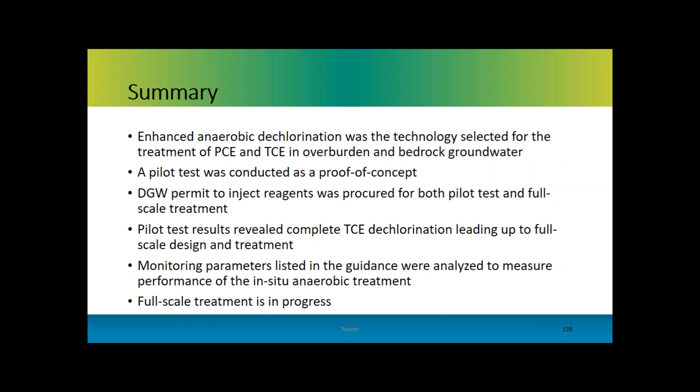With that, I'll take any questions you have.

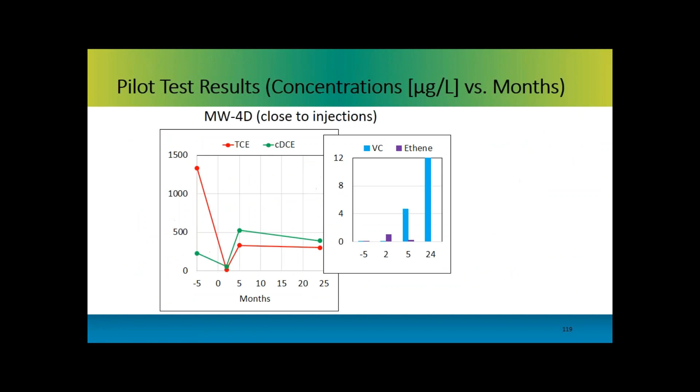to explain why CIS isn't increasing, that's the question. Compared to the baseline of minus 5 months prior to the injection, we do see at least a 2-fold increase in the cis-1,2-DCE concentration, shown in the green line. Then it starts to degrade, and we see vinyl chloride accumulation. In fact, for the full scale we have baseline CSIA information, a number like minus 12 delta 13, which means you have cis dechlorination - cis DCE is degrading faster than it can form from TCE. So we have very good evidence to suggest that cis DCE is forming and it is also degrading. I hope this slide clarifies the question, where we do see an increase in the cis DCE concentration.